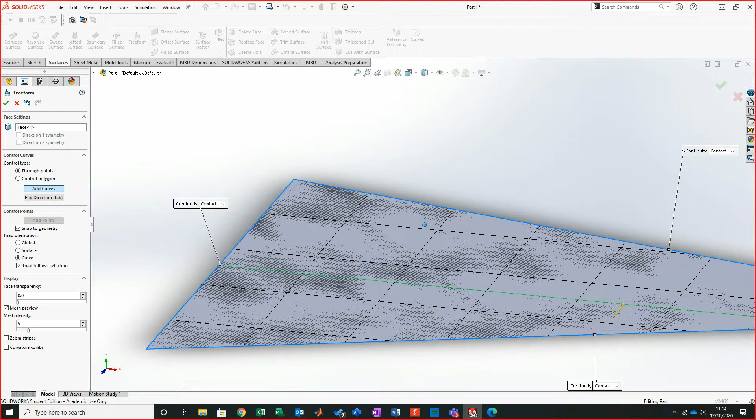Right, so we can add a curve onto it. Now all this actually refers to is where that point of deforming will happen. So I'm just going to roughly put it there. Now if I want, I can add 20, 30, 40, 50 curves if I wanted. In this case, because I just want to show you this, I'm just going to stay with one.

Then, once I'm happy with that, rather than left clicking, I'm going to right click once. Now what I can do is just go OK. Oh, hang on. Right click on there. Oh, it's not allowing me, so I'm just going to go add points. So I'm going to add my points. Now you see there, on these add points, it says where do you want to pull it from.

So this would be the equivalent of your finger and thumb on that material, on the piece of cloth that's on the glass. So if I left click on there, now what you see is these arrows emerging and a plane. Now the plane's based on the curve that I've added. These arrows are the normals based on the edge that it's coming from.

Now, as long as my cursor has an orange curve point on it, I could add more if I want. So I could go one there and one there. And then if I right click, this better work. My God, that didn't work either.

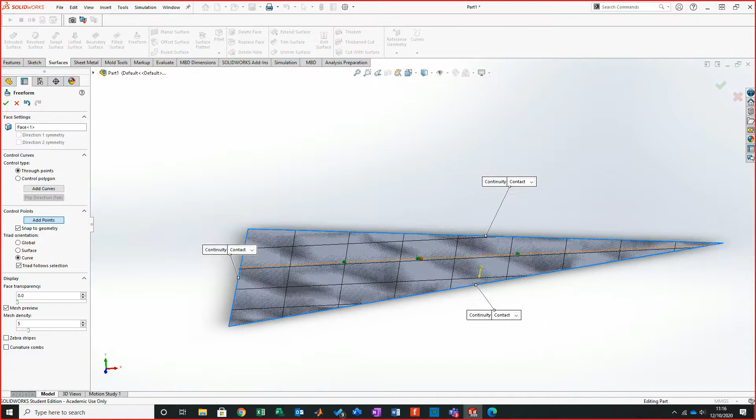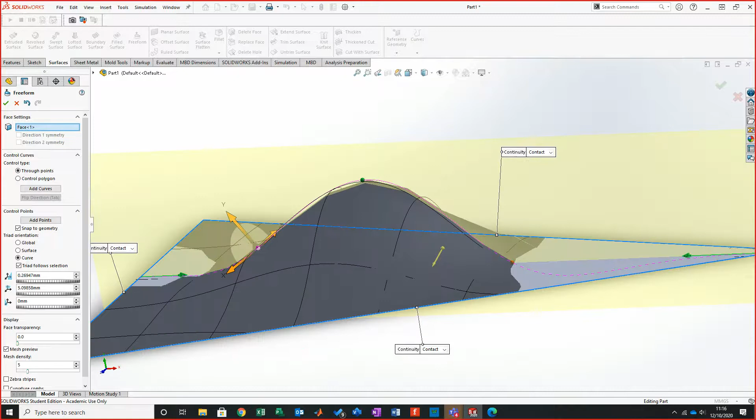Adding points. Let's have a look. So I've added my points. Right, thank goodness. You see there where it's come back. Right, I'm going to come off adding points. And now if I click onto the curve, what you'll see is that I can actually manipulate these. So if I move it up, and then move this up, and then this up. All I'm doing here is just manipulating.

2 seconds, had a question come through. Have I had a question? No, I've not. Oh, yes I do.

So, again, adding points. Click on add points. Add curves. Yeah, escape seems to work better. It does. I mean, normally you can right click and it should be able to jump it out, but that didn't work well for me. So I've done that manipulation. If I click OK,

now what I've got is a profile where it's manipulated, it's pulled, it's bent, it's moved like I wanted it to be moved. Now you can't really see that very well, so is that any better? No, that's probably even worse. But you can see there that it's created a profile based on my hand manipulation of where it was moving. And that is as simple as that.

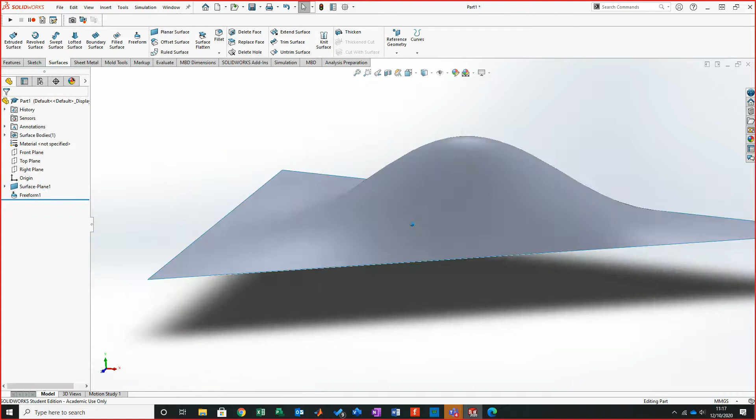What it must have is a way of being able to map that closed area. Without that closed area, it does struggle to be able to complete. So this is the reason I was showing you this. Well, this is one of the big tricks. If we get to something that's like this.

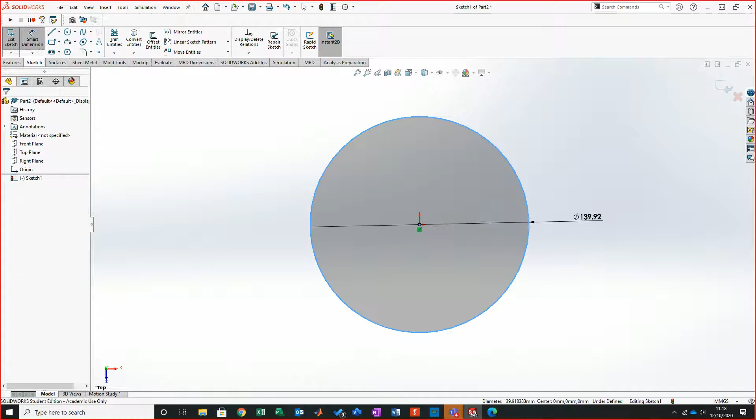So if I come to my top plane, I'm going to go back to sketch and bring in a circle and just drag my circle out. I'm going to go dimension, and on my dimension I'm going to make that 30 millimeters.

Two seconds, just had a question. The last question that I had personally, can you refine your question a little bit? It's not clear what you mean.

Right. So now what I'm going to do is go surface, and I'm going to go surface extrude. Now, based on the notes, I'll do it again, and I'll go 130 and click OK. And that now is all the geometry I need to be able to create the grip.

If you're getting that complaint where the green tick comes up and it says that it's not been properly modified, we're going to go through another modification now on here. I'll try and go nice and steady with it, just because getting used to the blasted thing moving like you want it to can be a real pain in the backside. So I'll try and go as nice and steady with it. It's probably the easiest way just to practice.

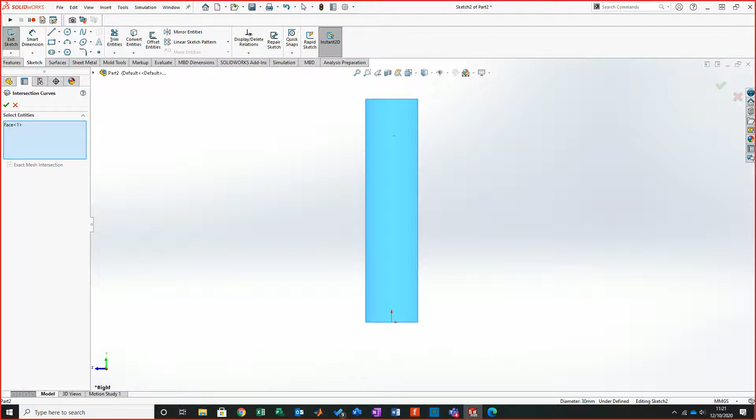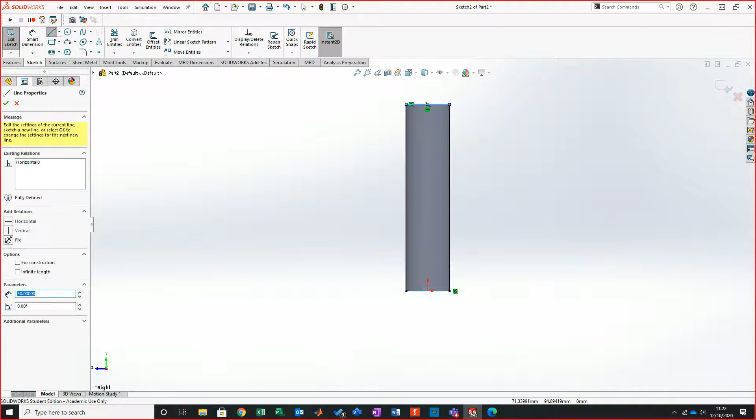So if I click OK on that, let me just bring that down, what I get now is 2 key vertical lines which lead on that edge. So what I'll do, Control and 8, bring that normal to view, and I'll just now close the geometry top and bottom. What this now leads to is a rectangle which gives me that reference geometry based on what I've actually put on.

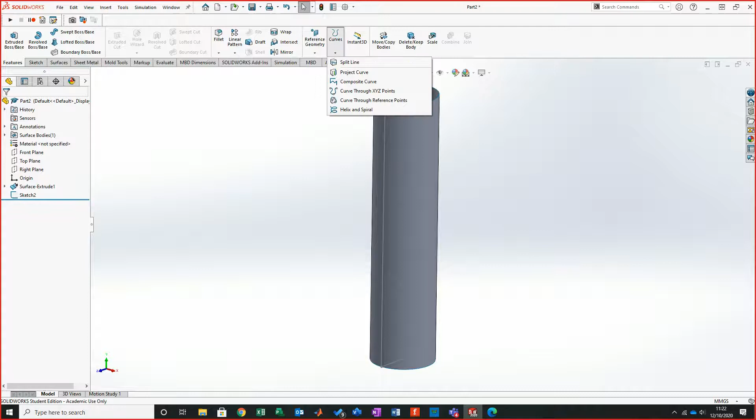If I come back out, I'm going to go Features, Curves, Split Line, projection from this sketch onto this geometry. And then all I do is click OK. Now what this actually does is turn the back and the front into 2 curved rectangles, the same geometric representation of what we've just been doing. So here and here. Now it gives us them all important edges for us to be able to freeform.

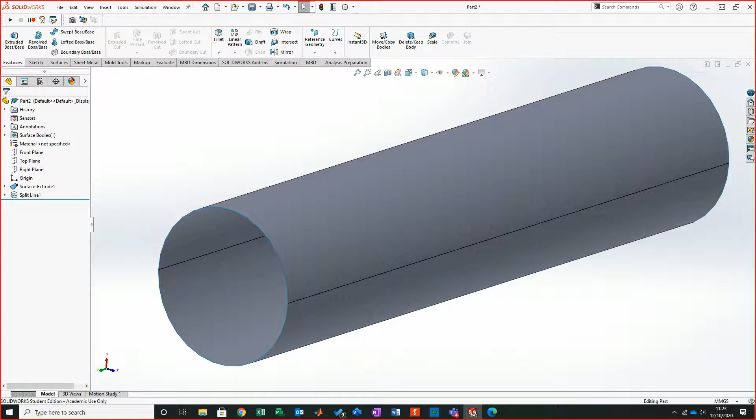So obviously we have our top edge, our bottom edge, and our key intersecting line edges that we've just split. So we've now got a good reference to be able to model one side, then model the other side. So what I'll do is come back, spin it out a little bit, and I'm going to go Surfaces, Freeform, and I'm going to split it. And as you can imagine, it's giving me the map across the whole thing. I'm only using one curve on this, so I'm going to just bring it back to show you what I'm actually doing.

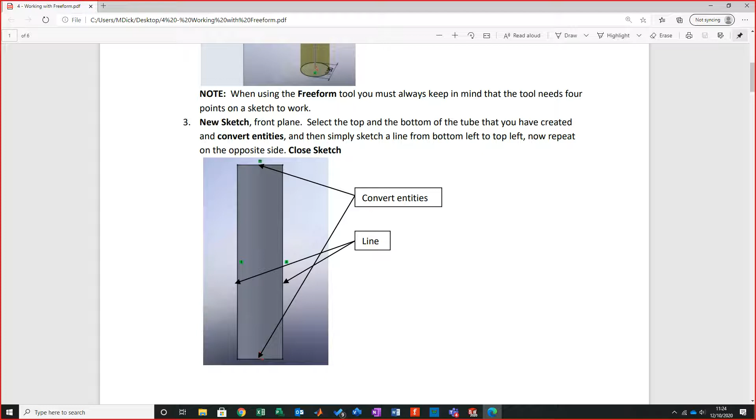That's a good comment, but we are on what, week 4? So the fact that you're asking me that is interesting. I've been recording this for 4 weeks. Does that mean that you've not interacted with any of the notes? But yes, I am already doing that.

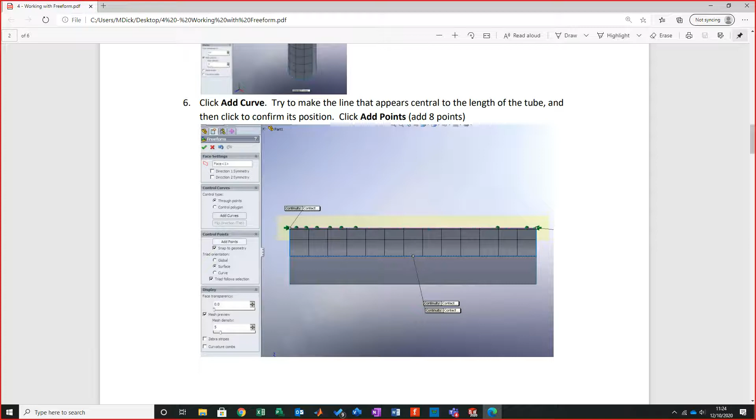So we're splitting it down, and all I'm doing is I'm going to put a curve, basically, looking from this right face, almost perpendicular to it. Let me just see who that is. I'm going to put a curve which is perpendicular to it, and I'm putting on 8 points. I'm going to put 8 points on there, and then from there I'm going to manipulate to get to that.

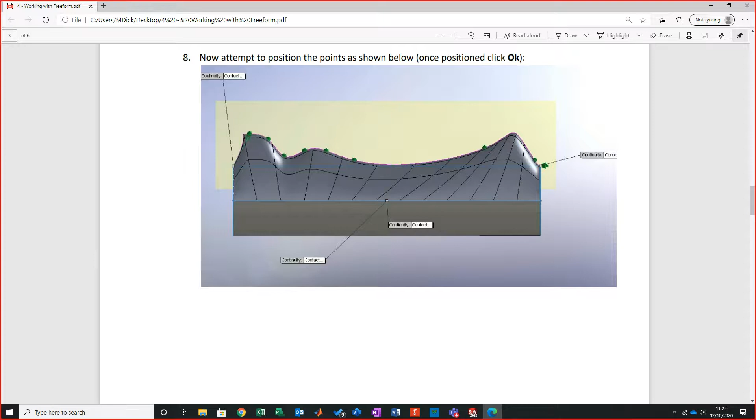Now it's going to be a challenge for me to actually recreate that again, but somebody told me that this is called the dipping hawk idea, where you end up with almost like the eagle head type, and then it curves down to actually create like the chest of the hawk. I didn't know that, but it was a student who told me that. Oops, that's me shaking my mouse too much.

Right, so I'm in that state, so what I'm going to do is come to my viewer. I'll go to right plane. Oh, is it not right plane? I always thought it was right plane I'd taken. Oh, there you go. That's the one I'd taken. So anyway, I'm going to go to add curve.

Now with my curve added, you should be able to see that you can only interface where that split line is. So what I'll do is just zoom it in a little bit. I'm going to bring that right to the perpendicular point that I can no longer see, so like there. And then if I spin it up, bring it round, I'll see my curve could be a bit closer, but I'm not too fussed.

Or what I could do, I've just realised what I could do. If I go to add a curve, bring it up, and I'm just going to try and line it up with, add a curve, come on you swine. I'm going to try and line it up with my markers. You see where my markers are? At the front and the back. Line it up with them.

They'll roughly sit central. You can put points on it, but with Freeform I have never spent a lot of time doing that, just because this is more of an aesthetic tool, let's call it. So I've gone escape, and now I'm at that point. Now if you look, I can now select the curve, but I want to add some points.

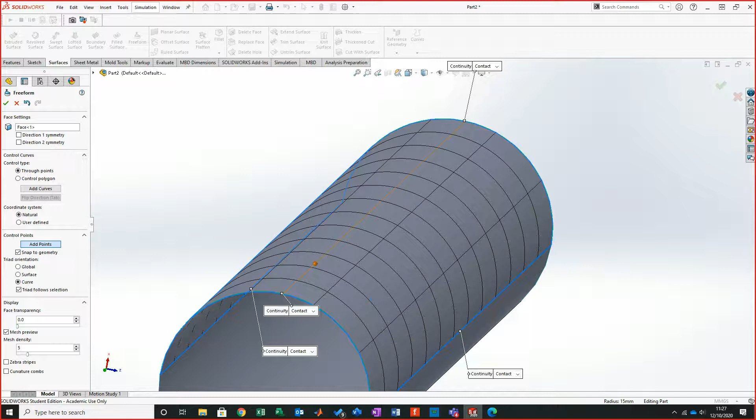Now with adding points, this for me is the bit where if I want to match against the notes that I've given you, this is the bit where I do try to match against what I'm looking at. So again, I'm just going to come back and go to my front plane. There we go, front plane. And let's have a look. So 6 are heavily grouped to the front. So based on the notes,

2 seconds, I had another question come through. Have I had another question come through? No. Apologies, just like to keep checking for questions.

So I've got 6 heavily grouped to the front, and I have 2 at the back end. So what I'll do is I'm just going to go 1, 2, 3, 4, 5, 6. And then to the back end of the geometry, let's have a look. So if we go just above, we'll go 1. And I go mid to the point here. This is what creates that dip. And then again, I'll just escape out of that. And now we're ready for manipulation.

Millions of things coming through. I have to keep checking because I don't want to miss your questions. I said ignore, but I don't want to miss your questions, so I just want to keep checking.

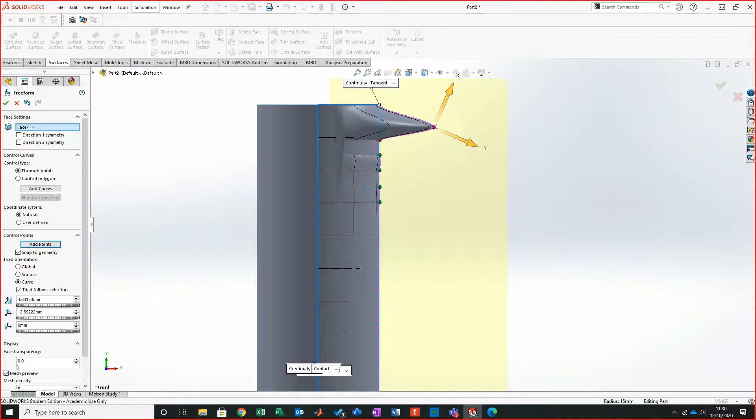So all I'm going to do is drag this point out. Now I know, when you first look at it you go, oh my god, that is awful. That is just terrible. Now what you want to do is try to bring that in to give yourself a nice curve. And if I click onto my line, where is my pointer mark gone? There it is. And I'm going to bring that in, because when you get these sharp edges like this, it does start to really look a little bit more slick. And I'm going to tighten that up a little bit.

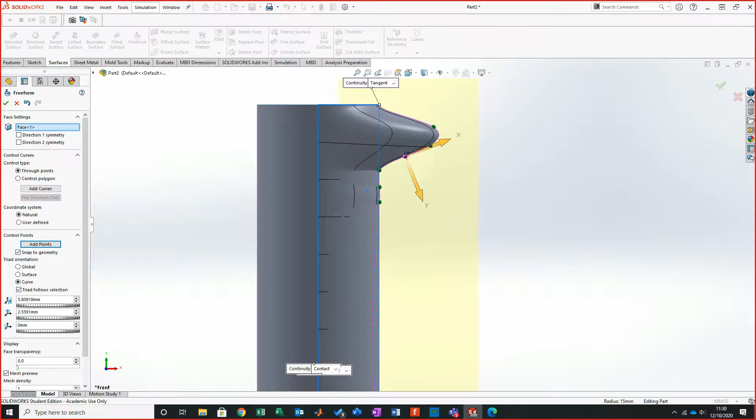And then what I'm going to do is bring that round. Oh, that's not working out well at all. Now this is where the system is going, your geometry is so crazy, I could never generate this. I don't know what you're trying to do, but make sure that you fix it. So if I clicked OK, it will bring back an error. It would say, I cannot work, I'm not sure what to do. So again, I'm going to bring that out. And this ripple here I'm not too keen on. Won't lie, not too keen on that.

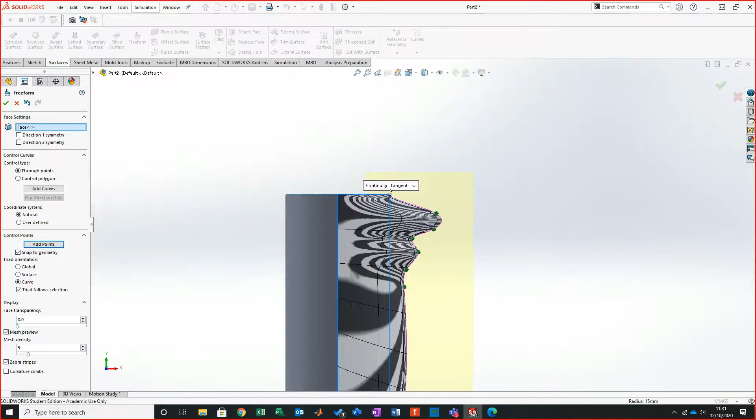Now if I want to see how it's bending, now often sticking this out can be quite useful, because you can look and go, this edge, based on these bends here and here, this edge looks a bit too aggressive. So what I can essentially do is take that back off, because it feels trippy. If I bring that back just a tad, bring that up just a little bit like that, and then bring that down a little bit.

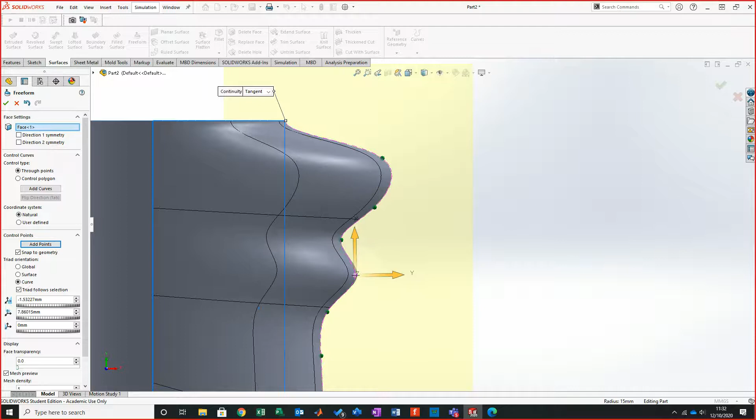Because essentially what I'm looking for is that almost fighter pilot button type effect. So what I'll do is just bring that up. I'm going to tip this out. Not convinced with that one. It's not one of my finer works. Right, let me have a look.

Yeah, you can, Harry. What you need to do is go back in, and then you need to start removing the points back out. Sometimes it's easier just to click cancel and start the fresh process again. Pain in the backside, I know, but what this is really about is just getting used to pulling these points into position and then getting your dips to move like you want them to.

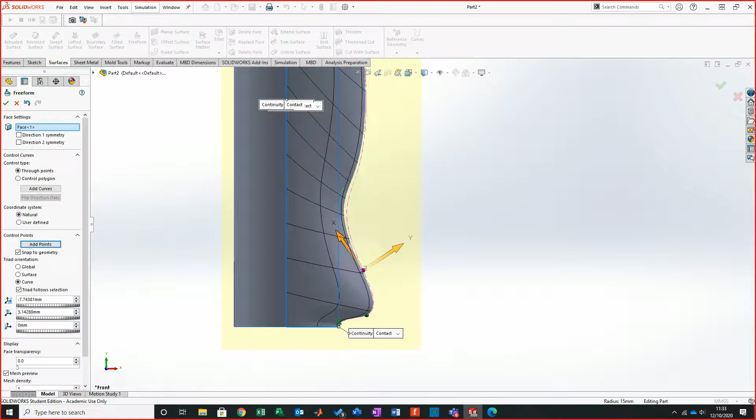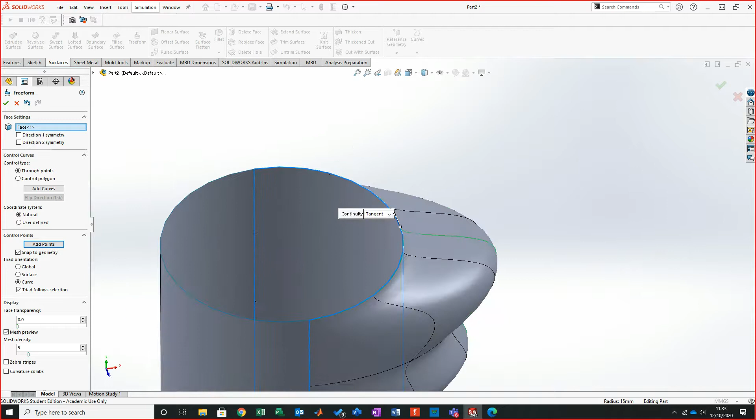Yeah. So this is what gives me that all-important arc between there. You can see there I've probably grouped a little bit too much together there. So if I bring these down just a tad and bring that down just a little bit. Yeah, it's not bad. Could be better in my eyes. I think it could be better. However, if I was marking that, it's proof of concept. How could I actually be anything else but okay, fair enough.

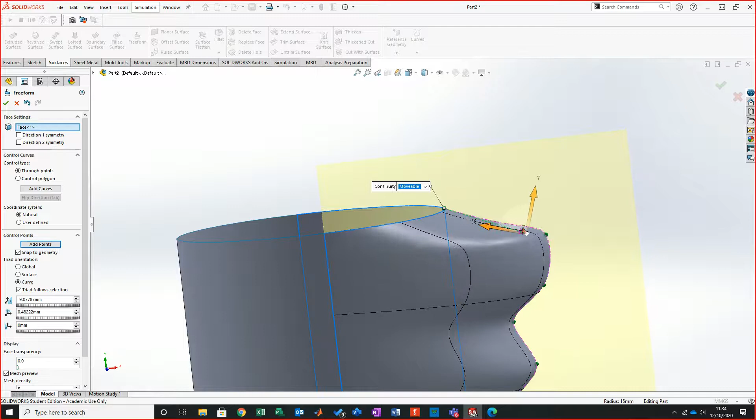So Moveable. Now I've changed that to Moveable. Now the reason is with that, what I can do is bring this out and then down a little bit. And what that'll do is it'll drag that sharp edge. You know the sharp edge where you're looking, you go, yeah. So if I bring this back across, see this sharp edge here? This sharp edge, yeah, it's good.

It's a good shout. Just to answer last question, it's a good shout. I've done the same thing many times. I just think, oh, I can't be bothered. So what I'll do is just start the actual full thing again for that exact reason. Yeah, I've actually had the exact same question on a personal message. So can I delete points if I've got too many on there? That's literally what we were just discussing on the main feed.

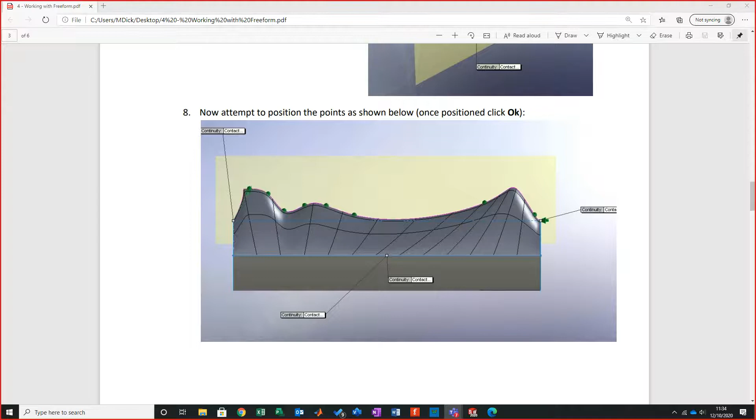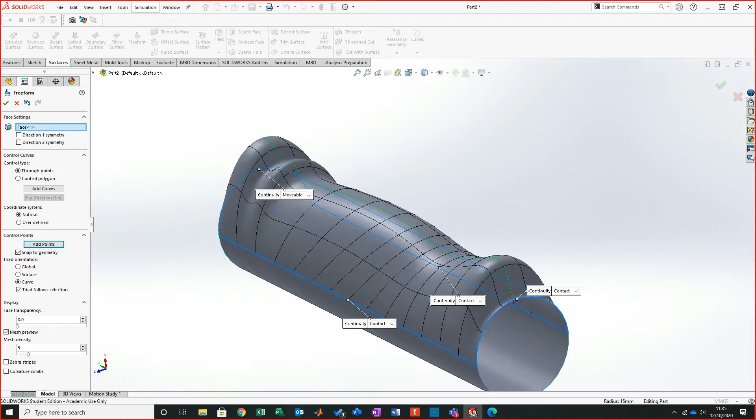You can do, but once you start deleting the points, you've got to redefine them, put them on again. And I swear to God, it's often easier just clicking cancel and then redefining that line again. I mean, it is with something like this, because you've got to remember, on something like this, we've got a single piece of geometry here, well, a single point of geometry manipulation. If you had something like 30 or 40 lines on there, then yeah, agreed, you want to start removing points that way. But otherwise, using it for something like this is quite nice, really. Right.

So, if I click OK, I've now got my first piece here. This is my first piece of geometry I've done for my handle. And then what I'll do is put on, now I like to try and make something that's almost parallel to, it's almost collinear as such, to the edging that's coming here.

I don't like to go too over the top, because you've got to remember what you're trying to do is get that grip. So your hand will naturally form, and what you're looking to try and do is almost sponge against the base of your hand, which, for anybody who doesn't know, the base of your hand is the most important part of your anatomy. So you break, you damage that, or injure that, you can lose entire functionality of your hand because of this small piece of muscle that's in between it.

The other question that I've just had, I take it that has been achieved in Inventor, and yes, the image that you've sent me, yes, you will find that. One of the group has just noted that this process, the entire manipulation process in Inventor, is achieved a million times quicker. Yes. As we know, Autodesk are phenomenal with being able to control manipulated surfaces. They are the daddies of NURBS.

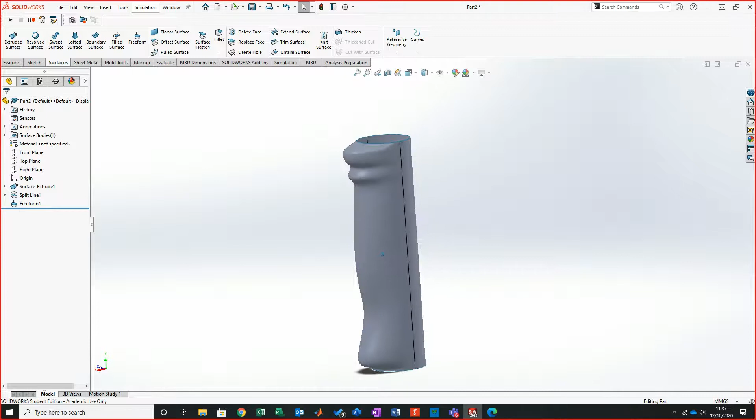Right, so I'm just going to spin that back round, and I'm going to go freeform, and again snap it onto that back, mapping that out, and I'm going to do the same thing, just add a curve. Going to add it to where them key points are, roughly where them control points are. Add that onto there, and then, like we were saying before, I'm going to click escape. Now you see where I've got contacts. I like to set these to movable, and that's what gives me the arrow. So if I go there and go movable.

Now when I start to add points, I'll get the arrows that allow me to drag the way that surface is flowing in between it. Gives me more control. Some people don't like it. They like to have almost like a very normal relationship between the sketch and that all important face that's translating. But I think having a movable aspect allows you to almost get a tangential relationship between the curve that you're doing and the transitional move. That is something you'd need to practice with. Get used to just manipulating, moving around.

I've added my curve anyway, so I'm just going to add my points. Now, if you've not seen it on here, I used the all-important 2. I went roughly around mid, well, it's just beneath mid, so it's actually more like there. Now the reason I'd done that is I knew that I was looking for a lower curve as it came down. This was going to be quite a wide body, and the lowering of that curve was going to be around here. And I've clicked escape.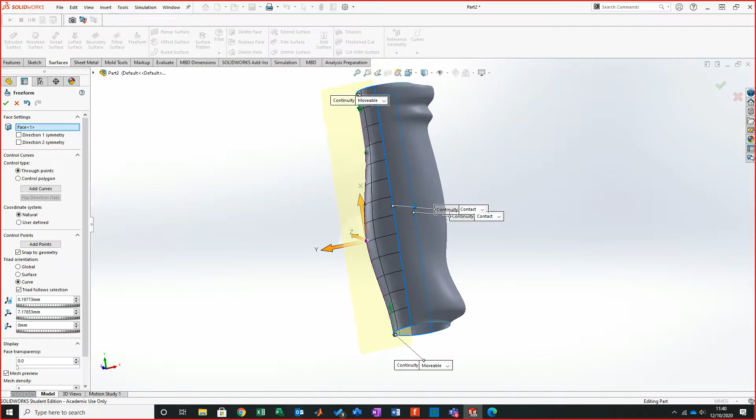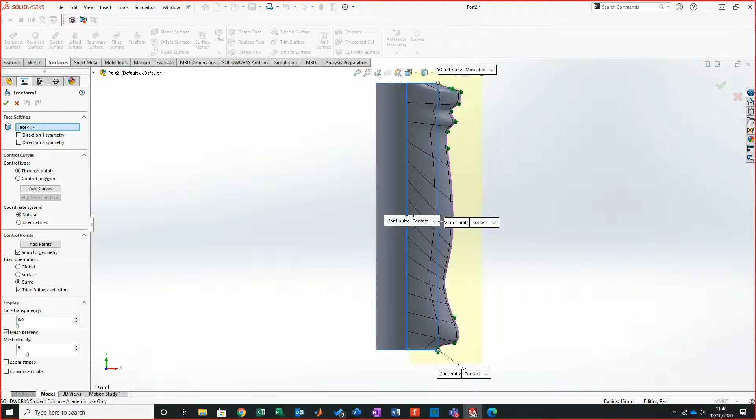So one thing I've realised, if you notice here, I've actually brought this profile out too much. I could do with that inner curve where it comes in, because this handle looks like it's got a beer belly. I'm going to come back because it's so irritating right now, I won't lie. So what I'm going to do is just come back, and I just want to change that because I don't like it. So come onto there, and these are good, but bloody hell did they get in the way.

So what I want to do is bring this down. Let's see if we can pop you in a little. Whoa! So can I just bring it out? A little bit there. Bear with me. Oh, I think I've wrecked that one. It's a little bit better. Oh, this process can become quite obsessive.

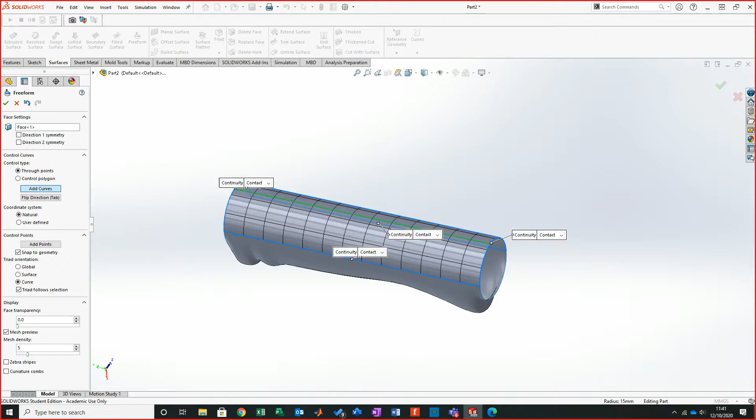Very obsessive, in fact. So I'm going to, again, add my curve because I just wanted that. I want it to give me that hand grip relationship. So I'm on there, and is it going to let me? I'm going to try it now. Right click. Oh, it worked!

Amazing, it worked. Can you believe it? Well, I can't. So I'm going to go just beneath that point. So I'm going to bring it just beneath, and then I'm going to add one roughly around down on my third division, so around there.

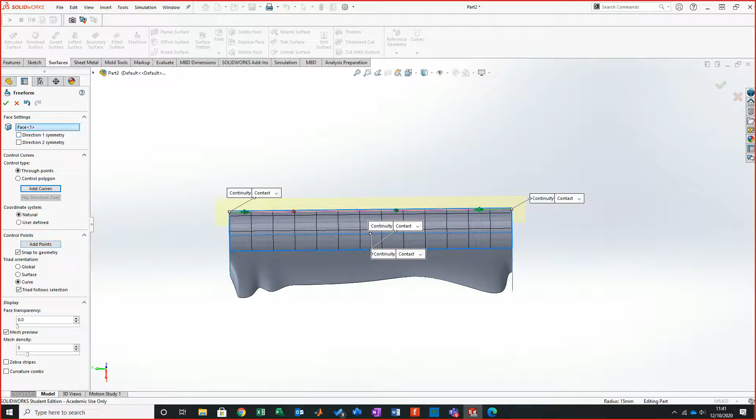And then all I'm going to do now is, is it going to work? I swear to God, it wasn't. I mean, you all saw it. It wasn't working. So I'm going to just bring that up, and I do this just because it gives me an insight as to what the relationship is across here. So if I bring that out, if I go like that, you kind of go, yeah, that's definitely wrong.

But if I bring that round something like that, you can see I'm trying to map against this flow here, and I've got this curve in here. I don't really like that, so I'm just going to bring that out a little bit. Bring that up a little bit. You see what I'm getting is that overall grip where the hand's going to be cushioned around it, and then the fingers are going to be manipulated to a key point.

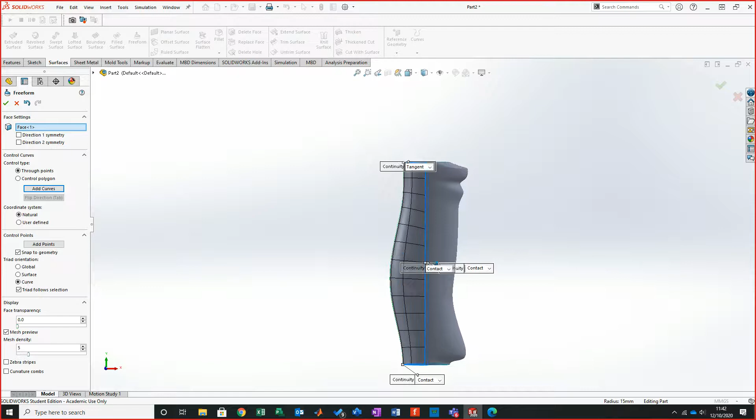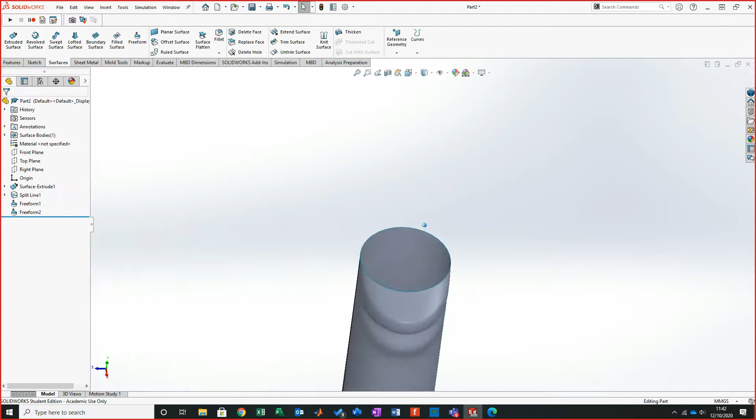Somebody told me, I don't know how true this is, but somebody told me that when you have a handle in this type of design, you naturally know that you want to be able to put your hand around there, and your thumb will almost want to tickle around this area, which I didn't know. I don't know how true that is, that's all. So I've manipulated, and I'm going to confirm it. Now what I've got is the overall geometry of my handle, which is good.

Right, so what I really want to do now is keep in mind that I might want to simulate in form. So I'm actually going to do everything in surface, everything, and only convert to solid at the end. So I've still got that freedom of saying, I'm going to change this, going to change that. In fact, it's crap. Let's change this, let's change that.

So I'll go planar surface. I'm going to go top, cap that off, flip it over, bottom, and cap that off as well. That then caps both sides. And all I'm going to do now is put in the internal stem.

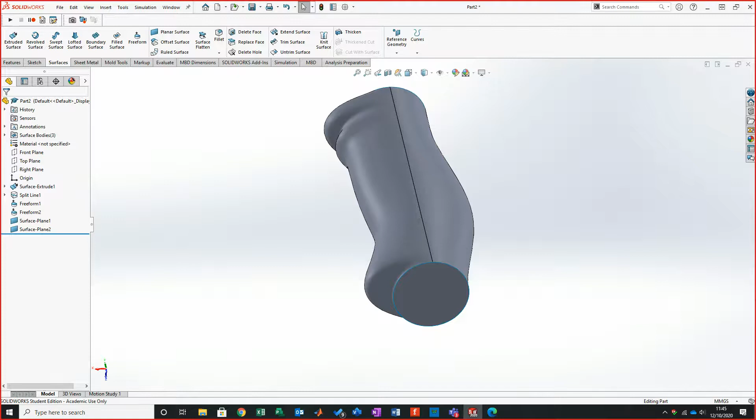Okay, I think that's the best answer. I hope that helps as an answer. I only actually say these answers with a real voice of experience, because it's something I've done many times before when I was trying to figure out how it's done, and then I realised what I was doing. This is me as a student.

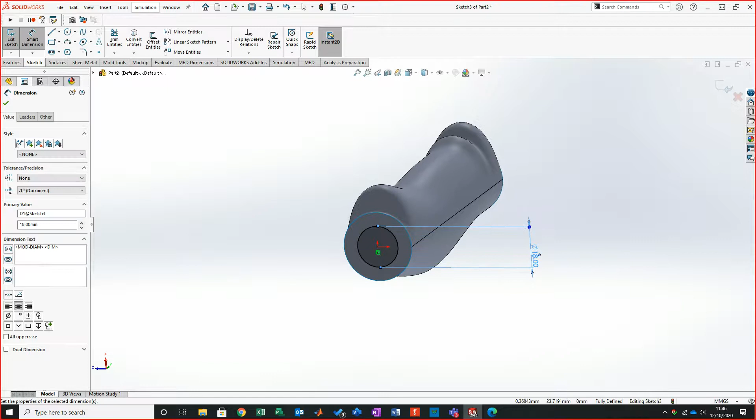So I'm going to click on my bottom flat, my planar face, click on sketch. I'm going to quickly put on a geometry, a diameter of 18 millimeters. So come onto here, I'm going to go 18 millimeters. 18 millimeters, by the way, is actually the diameter size of a lot of the hiking sticks, which at the time when I was first introduced to this, I didn't know. That's the rough average. No, that is the size.

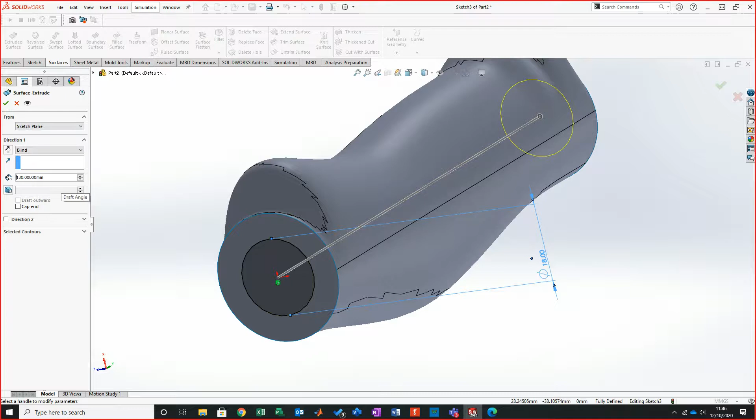So what I'll do is go surface, and I'm going to go extrude. What were we on? We're on 130. Come in, go 130. And then click OK.

Right, so I'm going to trim it. Now again, you'd often think, well, I can't seem to select that. How do I get that? So what I'll do is go trim. I'm going to go standard trim with this face, and it's going to say things to keep. Is it going to select it? Look at that. Oh, it won't even select it.

Then what I'm going to have to do is move to the next idea, which is using cross section. So let's try that. So then I'll go surface trim. I'll use that as a standard trimming tool, and things to remove. Then click OK.

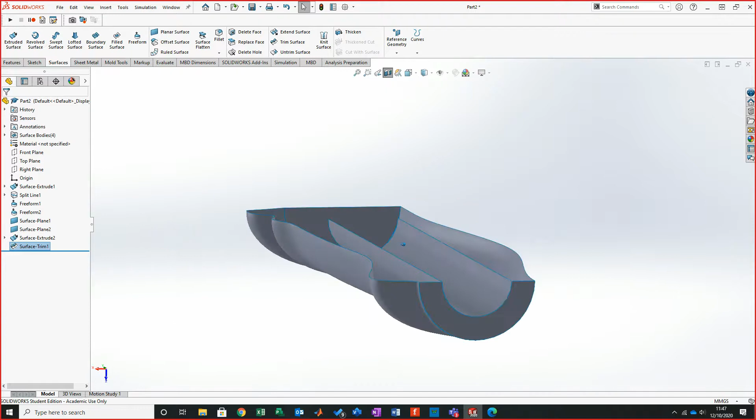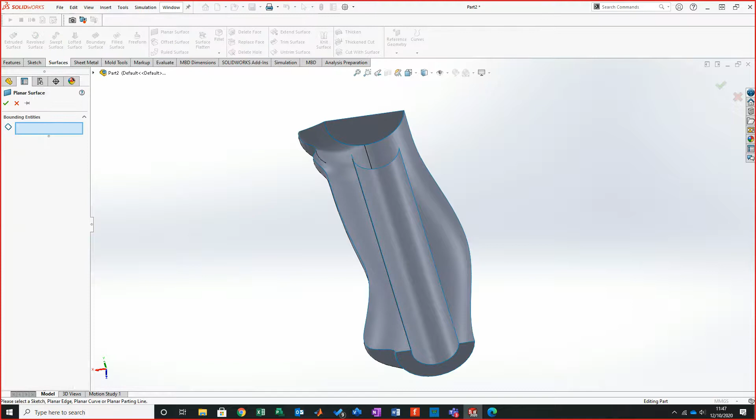And the one thing that it's now missing, because what I want to do is I want to be able to close this surface. The one thing that it's missing is a planar at the top, because if I close it off, at the moment it's still empty at the top. So I'll come back on, click OK, and I'm just going to put a planar surface on the top, and then OK. Close that off.

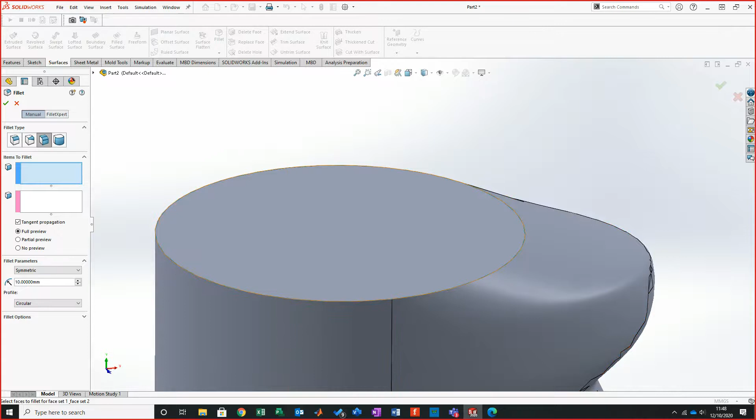And now, I can't remember if I've filleted this before or after. Oh, it's before. So what I'm going to do is go fillet. And I did this last week with the lofting. So we did a face fillet last week, if you remember. Now, as long as I've got enough space on this geometry up here, this should work. I've had a couple of times where I've actually swallowed this space up too much and there's not enough for it to fillet. So I'm going to click on my upper face.

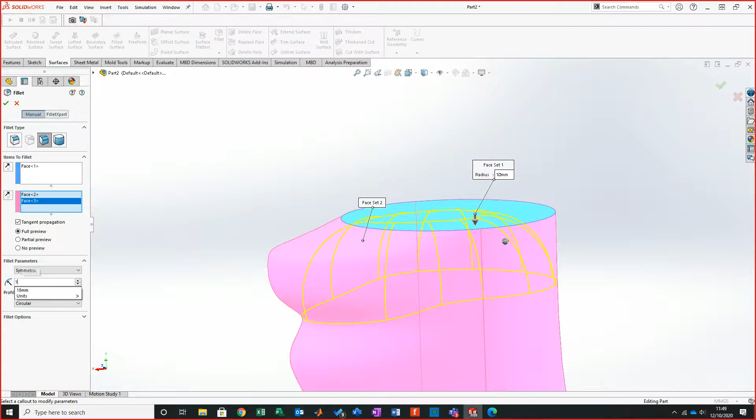Now my pull direction should be going down, because I'm actually wanting to bend the face inwards. And then what I'm going to do is bring in this face and this face. Definitely not 10 millimeters, just saying. Now the notes, I've actually asked you to put on a 1 millimeter. So you click OK, it should give you a nice fillet on the top.

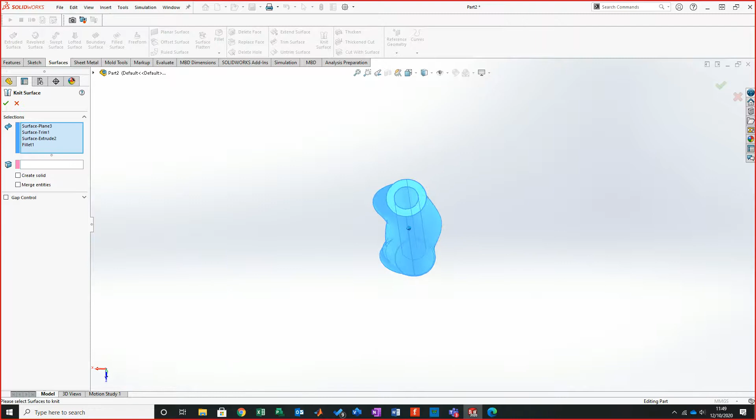Okay, so if you've not done already, we can now close all this off with a big old knit. So I'm going to left click, drag over the entire thing, make sure everything is selected, click merge entities, so this brings together any of the blue lines, and then click create solid. This now fills the empty geometry as a solid, and then click OK.

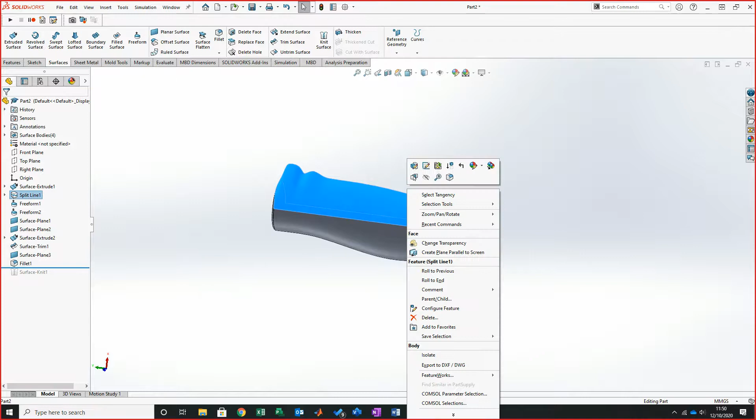So then just to check, again, I've now got that freedom again. I can go back and go, right, I can change that, I can do anything I want with that, I can even extract this. Now, one key thing about this, you've not really seen this yet. So if I just minimize that, I've just pulled up my progression bar here. Now if I right click on there, and let's have a look. If I right click, now let's say this is a solid geometry and I need some key elements from it, so I just need that profile.

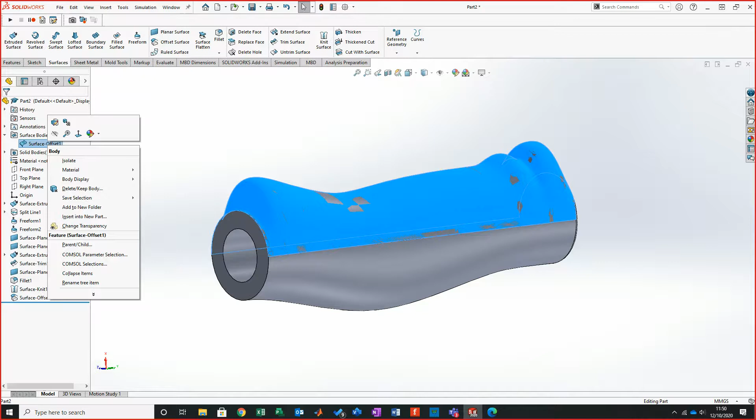What I can do, let me bring that back, it might be easier this way. What I can do is, if I go to surfaces, if I go to offset surface, I select here. If I select that to be 0, and then if I go to my bodies, right click here. Now I can do whatever really. Now this is my surface and that is my solid. So if I delete that body, I'm just showing you what I've now got is a surface geometry to use. Now this is a way of extracting important geometry.

If you're doing a CFD model and you're wanting to extract the internal volume of a combustion area, what you can essentially do is recreate the exact same thing I just did and actually create that volume and put that straight into ANSYS, and then start to look at the combustion process and the combustion volume area. If you're doing any type of shin guards for footballers, if you have a scanned profile and you want to make sure that it's ergonomically sound, you can take a reference of their body, if you will, and actually use that to model around it.

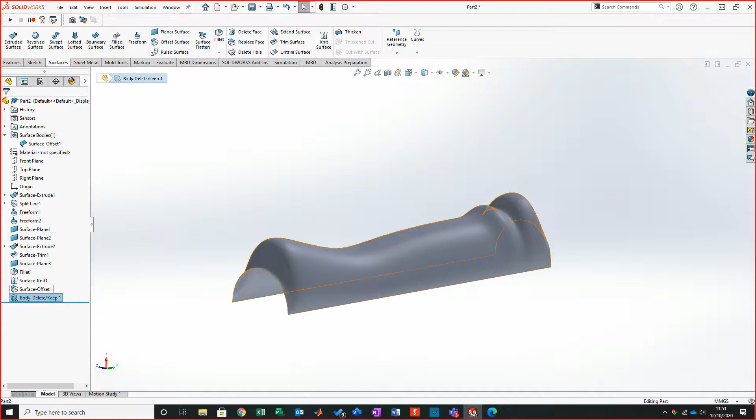This is not possible as a solid. You are extremely limited when you move to that particular point. Being able to have a lot of surface experience allows you to be really free in which way that you're going to go with your designs.

If you do, this is quite common, but if you do want to, let me just double check if I had a question come through.

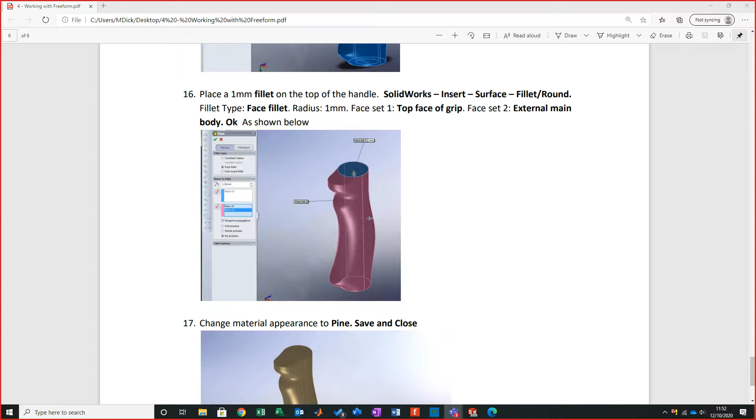If you do want to change the appearance of the material, now this is relatively new. I'm just going to change my material to pine and it should just change it. So I've gone onto there, gone to wood, go to pine, click apply, and I just made it a wood before. So what I'll do is just remove any lines, and that is your handle.

What I would recommend is that you practice. Have a go at using freeform. Choose something else to freeform around. This was just a stick. Let's say you were doing grips for a steering wheel, or a lot of the F1 wheels, they have a lot of grips. If you're doing any grips for mountain bikes, motorbikes, if you're doing a particular grip for equipment, things like that, have a practice at actually manipulating that. Get used to being able to do that. It is useful to know, and it is extremely useful to get used to doing.

Yeah, well, that's a very good one. The eco car wheel. So the wheels themselves, any bodywork that goes around the wheels. To actually do it, I'd be surprised if it took you 20 minutes to actually get some overall geometry. And granted, it needs to be manipulated, so it probably wouldn't be finished in 20 minutes. That I totally get. But moving around and getting used to doing that, it's dead straightforward.

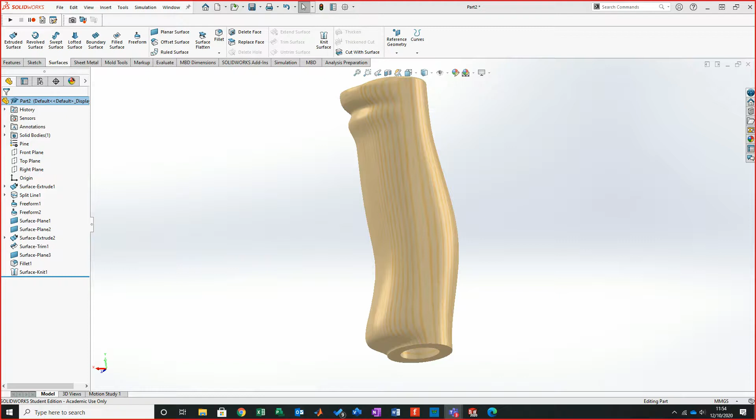So, I'm just checking to make sure I've not missed any questions. I've not missed any questions. Great. As I said, I'm trying to keep some of these notes shorter to allow you to practice, to be able to take a look at different things, and for me to help with any key problems that you're having.

Just because we are getting that one step closer, if you are on CAE and mechanical, you're going to be on the same assignment. Motorsports and aerospace, you are going to be on different assignments. There are going to be changes to these assignments, so please don't think that there's anything similar to last year. Well, there's similarities, but they're far from identical. Motorsports, just to let you know, I will be changing your vehicle as opposed to last year. So the approach will be the same, but your vehicle will be different. This year it will not be the Formula Student car. It's going to be something else.

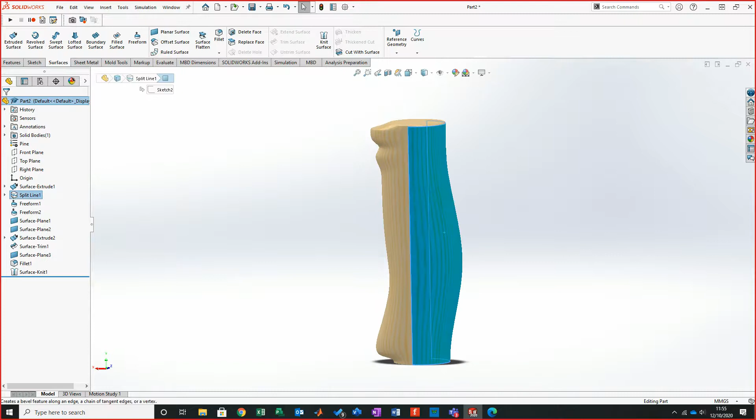Aerospace, you will have a similar approach, but it's going to be different. And CAE and mechanical, you are going to be tasked with something very similar to aerospace and motorsports, but it's going to be human. Right, so moving on swiftly. If you've not done already, save that. I'll save this because what I like to do is produce this, upload it, and then you guys can take a look as a reminder. At least then you've got everything that I was doing. So I'll just call this freeform handle.

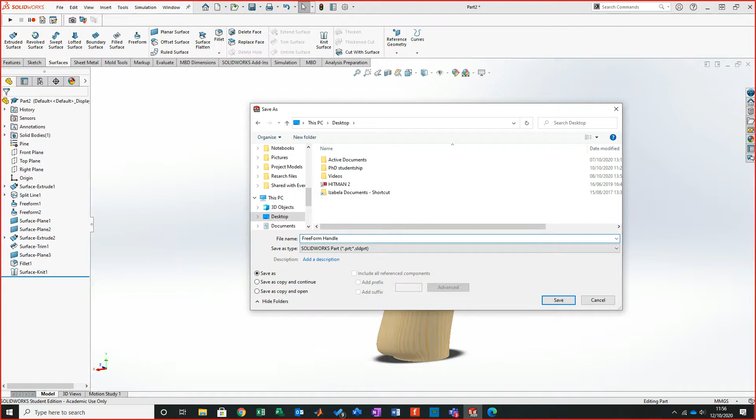And then I have another example that I want to show you. Now this one is dead easy, but it is really useful on the most pointless of things, and it is incredibly useful. The best way I could describe it is a phone cable. Two seconds, I'm just going to call up these notes. Now, some of you will go, yeah, I know how to do that. Surface helixing. A lot of you will go, well I'll just create a helix. But I'm not talking about a linear helix. I'm talking about a helix around curves, a helix as it moves in many particular ways, and how it can actually change itself. So the best example of a helix which is bent around randomized curves is a phone cable.

So this is the particular set of notes that I have. Now the one thing I should tell you is you can do this much quicker and much easier.

But I'm not going to show you that just yet. Not yet at all. What I'm going to do, first things first, open it up. Now this is about creating paths for our profiles to map around. Now don't be fooled by this. This is one thing where Dassault have never been happy. They've never been happy about geometry moving in 3 components.

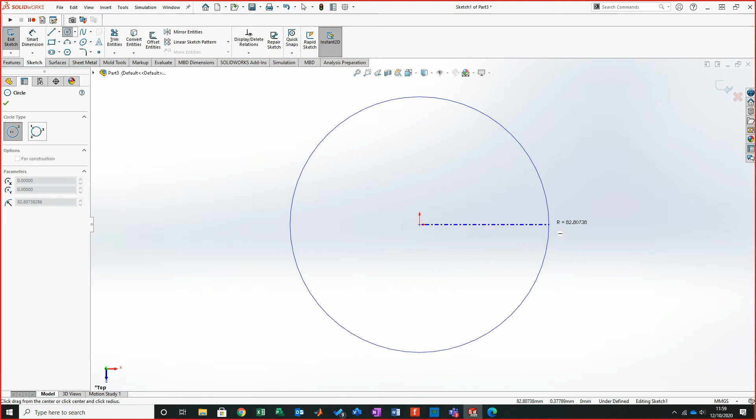I'm going to put on a circle. And just to stick with the notes, again I like to stick with it just because it gives you perspective of what it is that I'm doing. If I come back and I've got now one sketch, so what I'm going to do is put another sketch on the top. Do not put these two together. The most common thing that I find is many people go, it's alright, it's going to stick it together, be alright. Now look at the geometry that I've put on.

What's key about that geometry? There is one relation on it, nothing more. So don't bend that neither. So I'm going to put that there. What I'm going to do is press Control, fingers on Control, select the point, select the target, and pierce. Then from there I'm just going to pull this in and make it vertical. I've not got a vertical constraint on there. There is not a vertical constraint on there.

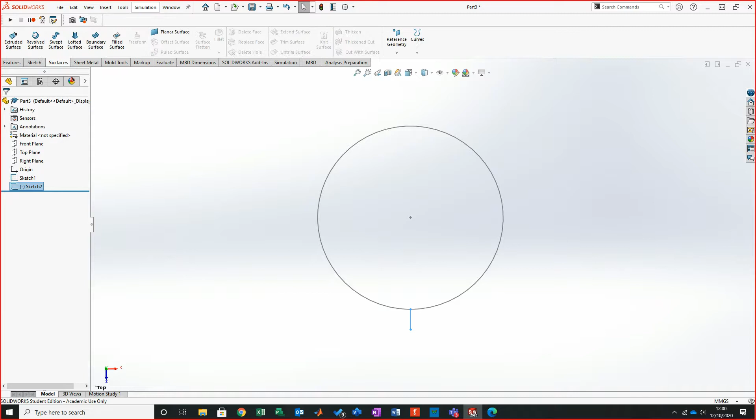Then what I'm going to do is come over here and I'm going to create a profile that I'm going to actually sweep with this. So first things first, I'm going to sweep my profile, my path. Then it comes back and says, yeah, that's what I can do. So if I go options, twist along the path, I'll go with a twist value. So with my twist value, I'm going to go number of revolutions. I'll probably just go 15. Is 15 going to do? So 15 is not so bad. So with 15, now I've got this almost like a ring of quavers type look.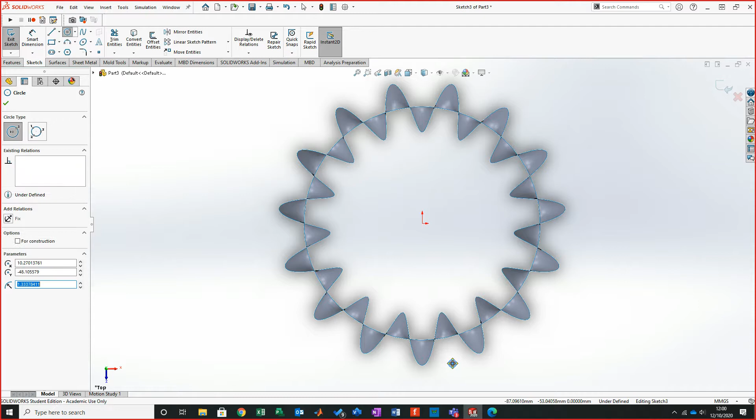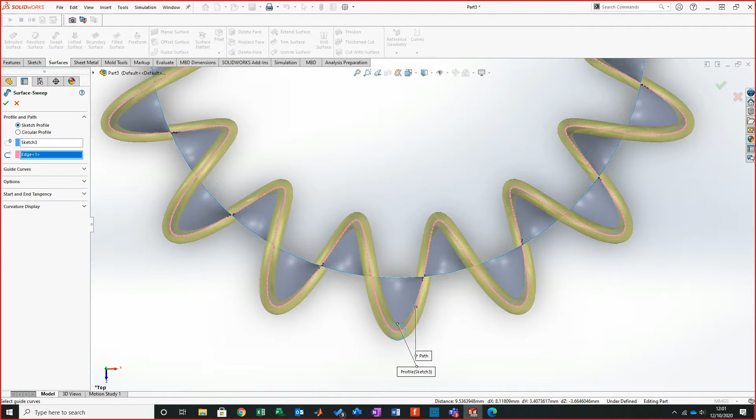Now, if I want to create something to follow that path, what I'm going to do is go to Sketch and Sketch. So I'm going to put on a circle. Oh, what circle size did I put on this? Oh, I actually didn't put one on. Incredibly naughty. Press Control, select the point, select the path, and pierce it. And then all I'll do from there is surface swept along there. And that gives me my, it's like a, I don't know what you call it. I'm sure somebody's going to tell me what it's called.

In the answer to, is there a pierce constraint in Inventor? This is what's really frustrating. Autodesk don't need it because they are masters of moving around curves. They are incredibly good at moving around curves. So in Inventor, as long as it's constrained to the path, it will always try and move around that key defined geometry. I was asking that very same question not a couple of days ago, and that's the answer that I got. And if you look at some of their algorithms that they use for relation of sketches, mind blowing.

But the trouble is they put so much on there that sometimes it hinders you. So this is where Dassault stuff comes in and stands on its own. It's such an interesting contrast between the two. Right.

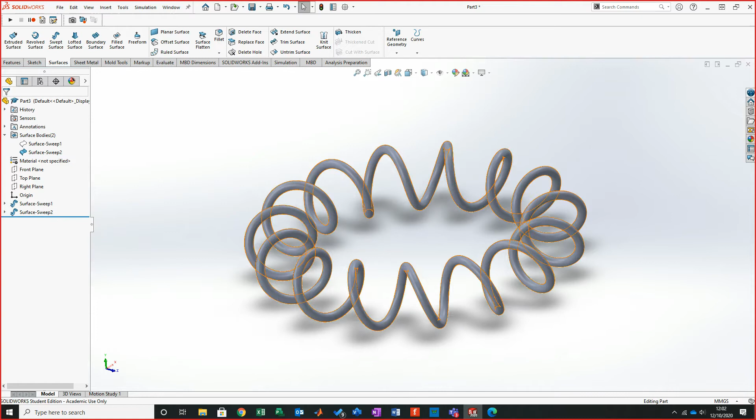Now, bad about doing this. I've hidden a surface. Hiding surfaces and not dealing with that is incredibly bad technique. Hiding surfaces is a very frowned upon technique. So technically, that geometry is what I'm after. The problem is I've got a hidden surface. My challenge to you now is figure out a way of fixing it. I will give you 5 minutes to fix it, starting from now.

No! That's the point. If I hide that, if I export this and put this into, let's say, Cura, let's say I put this into ANSYS, ANSYS instantly sees this. Ooh. No. It's a good point. Don't get me wrong. It's a really good point, and that would be my first go-to. In fact, shall we have? Let's have a go. You're obsessed with hiding. No.

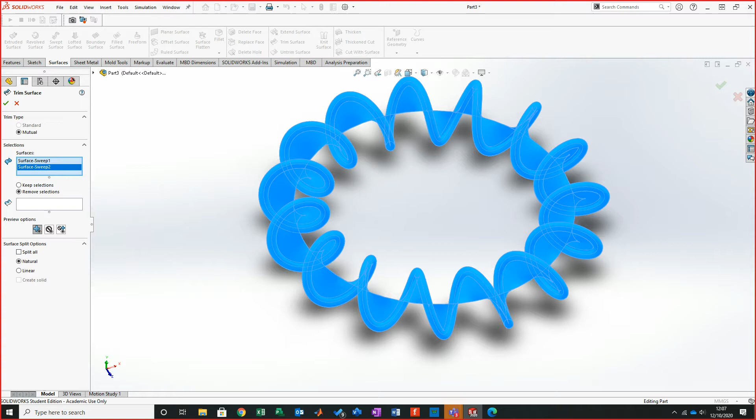So what I'll do is try trimming it. If I go mutual, I'm just going to try this because I won't lie, it's not one that I've actually tried before. So let's try removing surfaces. Is that going to work? That did work. Look at that. Nice. Yeah, like that. But there's a quicker way of doing it. That's a good answer though. That's a very good answer. But there is a quicker way of doing it.

This is just a nice... I always run this particular example because it's a nice way of getting people thinking, well, how do you do it quicker? We've done it. We've literally just done it. And when you see it, there is a massive anticlimax with this, I won't lie. You'll come away and go, oh, that's a bit crap. Okay, so the anticipation is killing me. I'm going to show you.

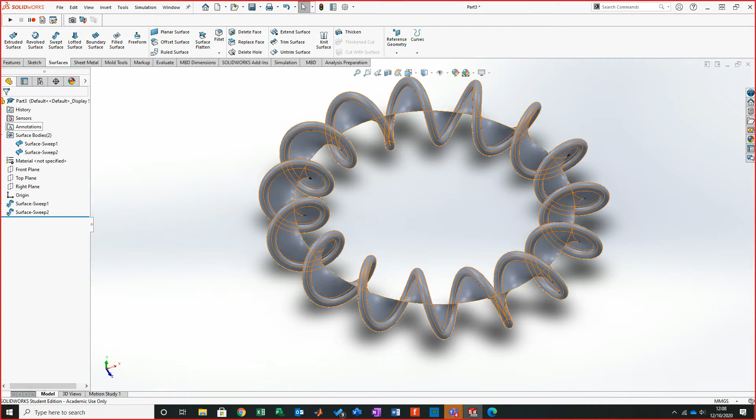I just want to point out the answer of trimming, splitting and hiding. No, we're not splitting and hiding. Trimming would be a good answer to it. You may come across that way, you'd have to do it again. Totally get you with that. However, what I wanted to do is do away with having this all in together completely. Now I always do it the long-winded way, the mess-you-around way, because I'm just trying to get you to think about what it is that you're doing.

So let's go back to the original. I went to Sketch and, sticking with the notes, I think that was 80 mil. Yeah, so we're 80 mil. So I'm going to set that to 80 mil. Boom, we're now in a fresh state position. We know that is the path.

So, I'll tell you, I was praising naming and I've not been naming all morning. How bad is that? I swear to God, I don't know how to fasten my own shoelaces.

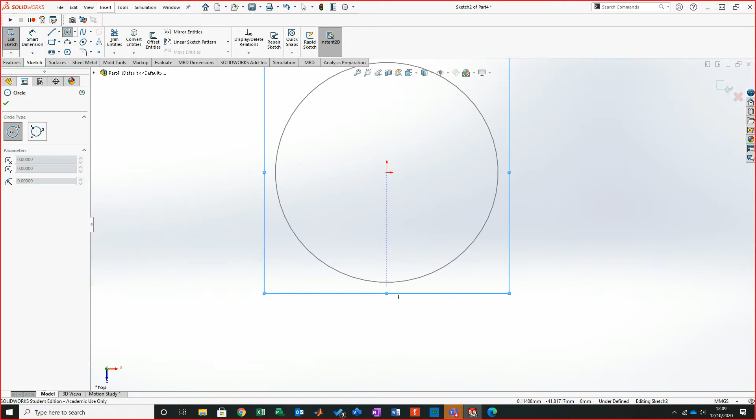Right, so what I'm going to do is go on to Sketch. Remember we did a line. Why not just do a circle? As I said, a big anticlimax. But why not just do a circle? So the issue that we get with this now is it can have a meltdown if these geometries overlap each other. So what I do is come back out. I'll just rename that as profile. So as ever, you get your profile and your path.

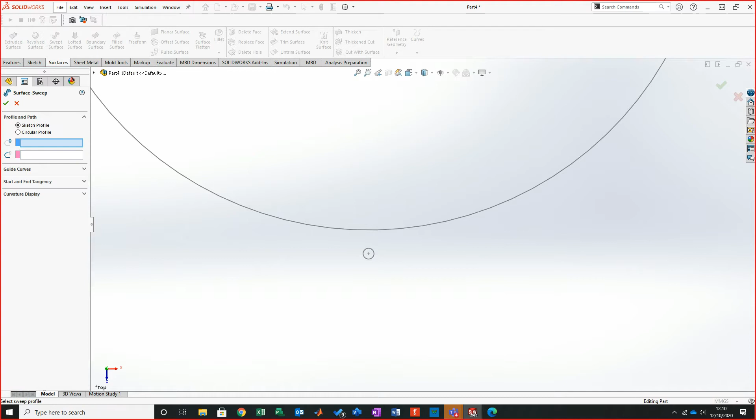And if I go to surface and sweep, I should say swept surface to be more accurate. So I choose that's my profile, and that is my path. Now as ever, the system comes back and says, these two aren't connected, what are you talking about? However, this is one thing that it doesn't clearly explain. If I go to twist along path, I'm going to twist the specific values, revolutions, and then I'm simply going to go 15.

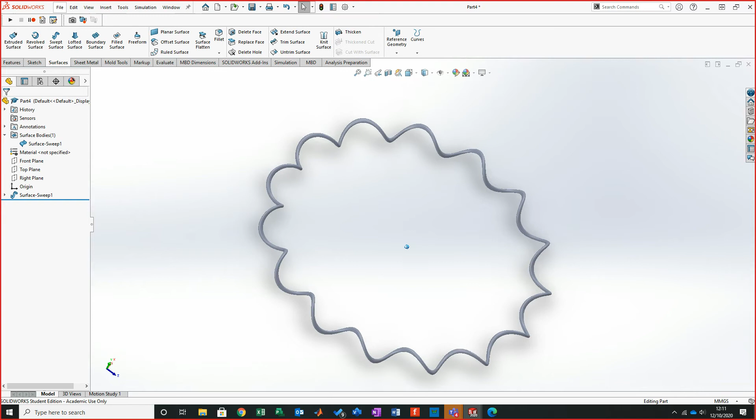What it now actually does is it creates a profile that can move along that path. It's a bit stretched, I can make that a bit bigger. But now what I've got is the whole profile in one surface. This as a tool is great, it's really good. Because now what I can do is get really cocky, and I mean really cocky. So I come back and I'm just going to delete that out.

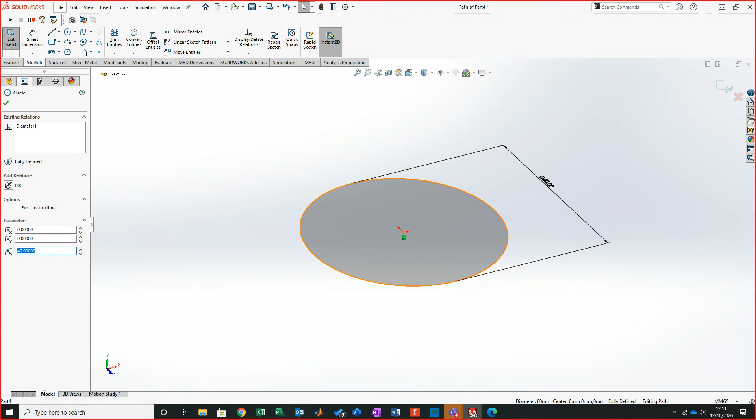So going back to my path again, I'm going to edit this path. And for this I'm just going to turn that into construction. I'll leave that on there, at least then there's a reference for me. So if I go Control and A, and rather than having a linearized path, I'm going to go right up here, over to there. These points, by the way, there's no specifics. And click OK. And then close. Now I come back to the profile.

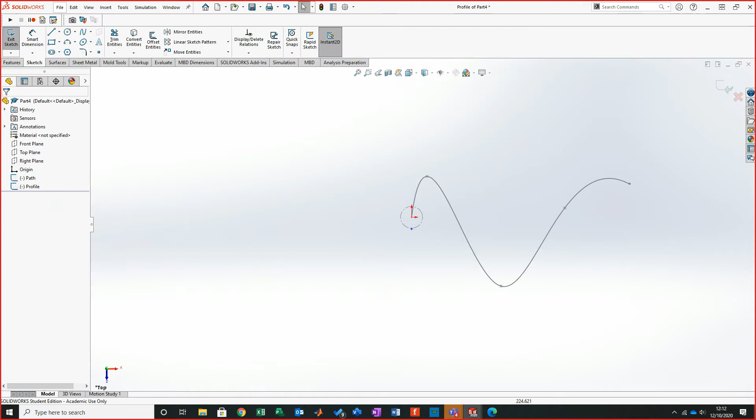I keep seeing flashing coming up, I have to keep checking for questions, I don't see any.

Now come back to the profile, bring it up, bring it down, and now if I do swept to profile, path, now it just has a bit of a meltdown. It kind of goes, what the hell am I doing? So if I go options, again, I'm just going to go for my normal. I'm going to twist along the profile.

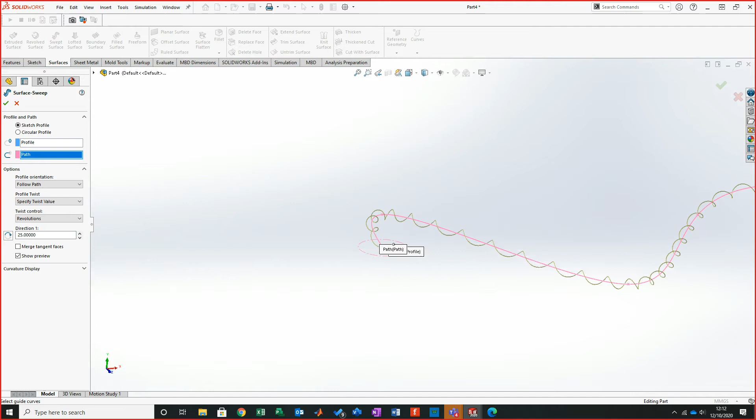Now this is where it's going to get tricky. I'll show you what I mean. If I come on here and go 25, is it going to do it? Oh no, that did it pretty well. What I've actually got is a stretched spring. I've got a cable. I've got a phone cable. I've got a spring that moves around a particular path.

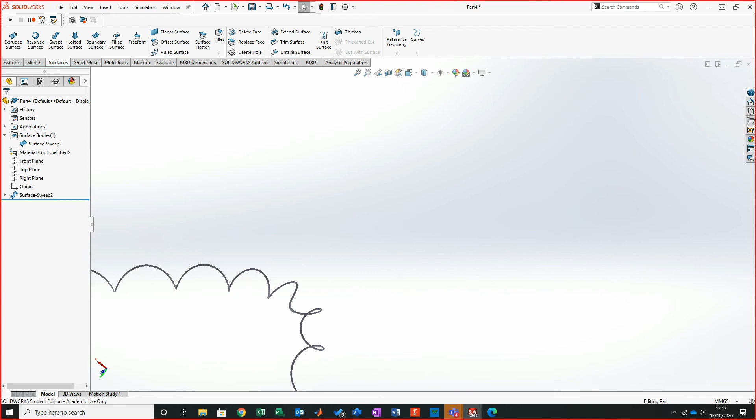I've got multiple ways of being able to describe this thing moving, and the beauty is it will stretch relative to how the curve appears. So I'm now in a state where I can do all sorts with it. If I zoom in, it's just a normal path between it, but now I've got such freedom of being able to helix around a curve, a spline, a path. And that is one beautiful tool on it.

So that is a way of helixing. I've actually already shown that there, but the reason I put this on here is because I want you to think about making it better, making it quicker, and making a better way of being able to do it. If on your assignment you can minimize the sketches needed, if you can minimize the amount of stuff that's being interfaced, you're actually in a very strong position of being able to do more and more things with it.

A lot of you here won't recognise this as being a landline cable, but this is very much a landline cable. This reminds me of when I was a kid, to be honest. You had these big, awful, like weapon type phones where they clung together. But yeah, this is very much the old landline cable, and even some of the newer phones don't have this type of effect. But this can be useful on many different aspects.

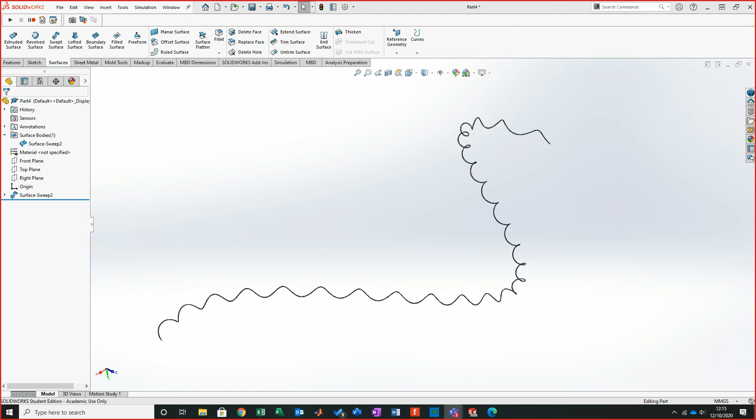Right, so as far as notes go this week, that's all I wanted to actually do. These keynotes here are just about getting used to small tools that you wouldn't be aware of. What we've done today is look at Freeform as a tool. We did a basic example, and we produced a part which is very common.

What I'm now going to do is put myself on mute and hide my camera. I want to use the rest of the time to answer any concerns that you've got, or to help you if I need to step back and show you some other things that you've not covered, or you struggled on particular extra sets of notes. The only reason I say that is next week we will move to a boundary surface, and on a boundary surface, boundaries are incredibly tricky. And I want to make sure that everybody's up to a particular speed.